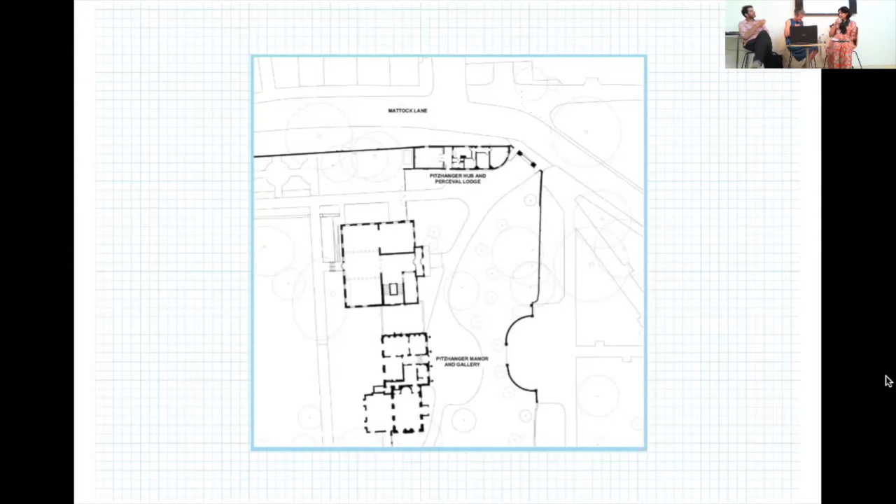One of the first decisions we started to make was the idea of a transition space, how to deal with the facade of the existing lodge, and how we could create a space and how that space would link. Initially, programmatically, it was preferred to link the buildings physically, which presented a series of very problematic architectural decisions about how we would actually deal with a listed facade delicately and sensitively. We did look at several ideas. We had ideas of having a glass roof there.

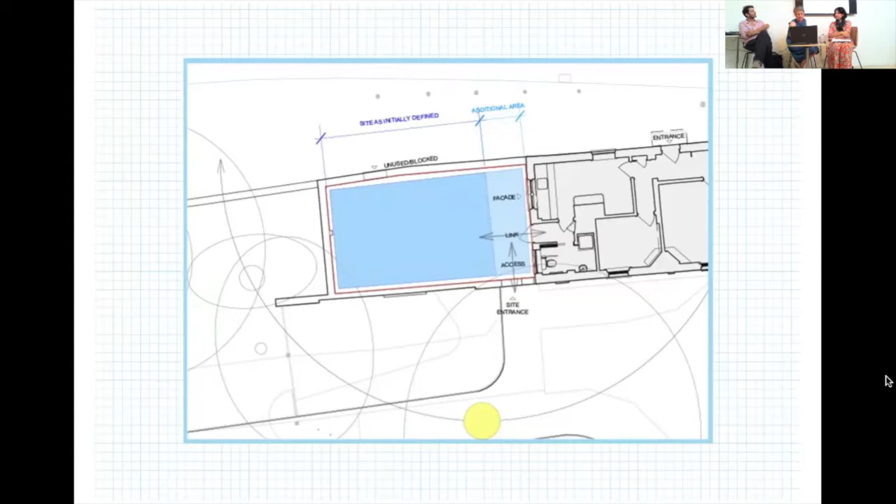Obviously, programmatically, it was a transition space because of the doorway and the circulation routes between the lodge, the manor, and this space. And we also wanted to see it as a transition space architecturally. So it was always the idea that it would be a different type of space there to here. Eventually, through many different options, it was decided that the best thing was to leave it as a courtyard, a completely open space. And there you see the courtyard, which has become a lovely place for us to have our lunch and have meetings when it's sunny.

So the decision to use the existing courtyard walls threw up a set of interesting challenges for us. Building within the courtyard, we found that we were working in a kind of hybrid type of building, because it wasn't an extension, nor was it a standalone building because of its relationship with the lodge. It wasn't a new build, nor was it refurbishment. So we found that we always kept slipping between two stools in how you might justify or consider the building.

Well, Steve might talk later about the problems with justifying the walls structurally, because they were built as garden walls, and yet we wanted to use them as a wall to hold a building up. And that's quite an interesting issue, I think, with reuse of spaces in brownfield sites. And also how to make these garden walls become firmly dry and thermally efficient to create a warm space.

Another technical challenge was that, as you mentioned earlier, the walls were not orthogonal. They were not orthogonal in plan, and they weren't orthogonal in section. So they sort of wobble all over the place. But there's a very strong kink there, and I don't know if you can see what we've actually built. The roof is orthogonal. We made a decision to build the new roof orthogonally and have it sitting on top of these sort of wobbly walls.

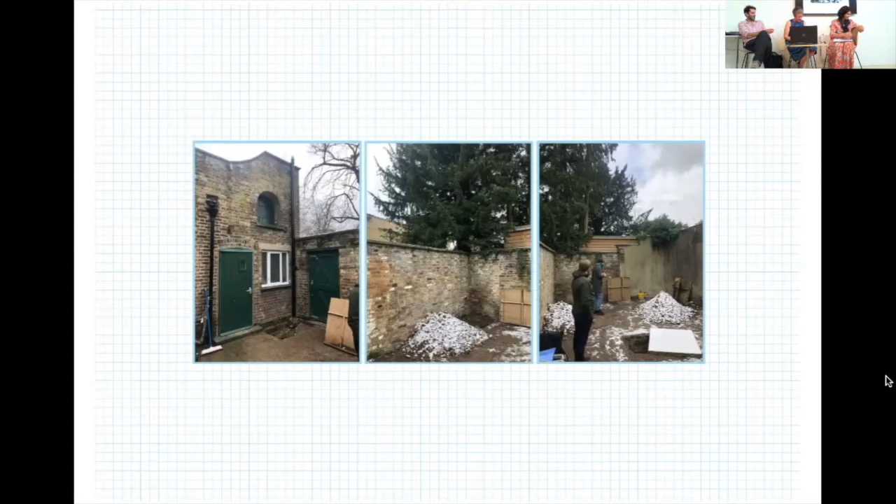So obviously, what would John Soane do now? We had to develop a response to that question. His work is famously rich and multi-layered, and we could have taken it in so many different directions. The areas that we explored were notions of buildings within buildings, glazed lantern structures, ceiling architecture, internal lightweight tensile forms, geometric artifice, ambivalence to resolution, the use of innovative technologies, and crucially the play of light.

So using the external walls, we made a decision quite early on that we needed to take the higgledy-piggledy and calm all of that down a bit and try to respond to the rigor of Pitzhanger Manor, and to create a sort of visual order and clarity to our intervention. So we very quickly decided to form a datum, and the datum that we chose was the height of the lower wall on Mattock Lane.

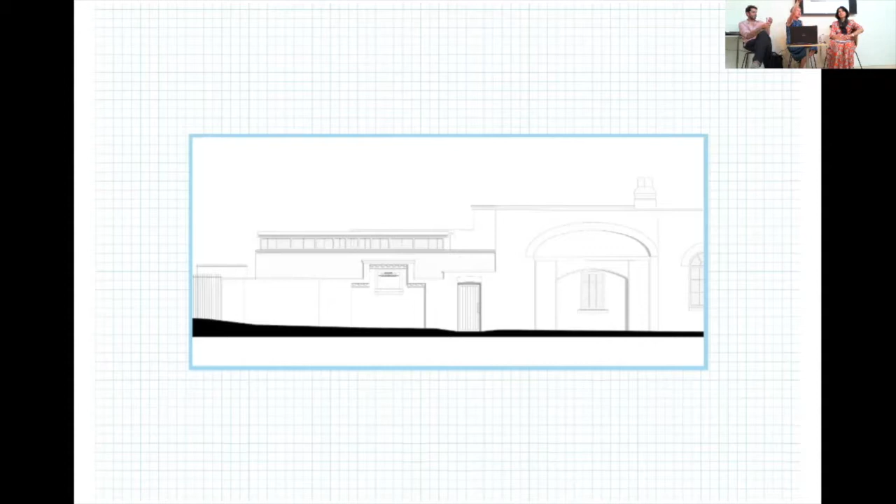And here's an early drawing that we did that was exploring how we would work with all the different varying heights. So we have a wall that's higher, we have a wall that's exactly the right height, we have a wall where our roof just tucks under the wall here, and then we had walls that were much lower. And so we built the walls up to the datum, and the datum became a strong visual reference point all the way through.

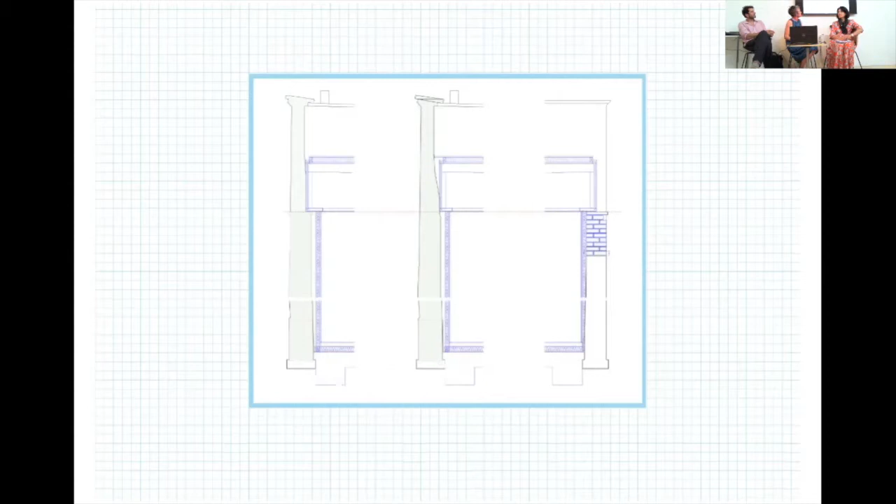So aesthetically, we wanted the wall, especially the wall here facing Pitzhanger, to be read as a single wall. But we wanted the history and the contours of the wall to be legible when looked at closely. So there was this sort of double reading of the wall, really, but it wasn't something that shouted at you, but it was there.

So I'm just going to go back to this approach, though. Building the walls up and retaining the masonry walls meant that we didn't have any opportunities to get natural light or ventilation into the space at lower level below this datum. And so at that point, in response to the Soanian lantern, which you can see just popping up behind there, we decided to use the idea of a glazed lantern to create the roof that sat on top of the walls. Here you can just see it popping out behind the taller bit of wall. There.

And there you can see the idea of the roof just sitting on top of the walls, coming down as a lantern. So from the outside, it's a very modest building, sitting quietly against its neighbour.

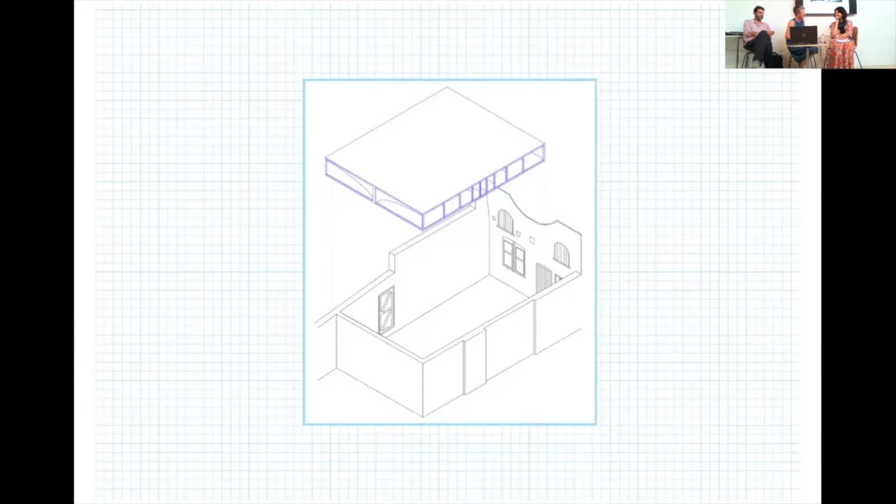So Steve will talk about the joys of making that work structurally, that decision. Soane was called a ceiling architect by the 20th century architect Philip Johnson. And there are so many beautiful examples of his ceilings, even here at Pitzhanger, but elsewhere. His work is described as playful. He was not rigid in his use of geometric form, nor is he concerned with resolving or explaining the structural resolution of his work.

This playfulness allowed us to feel that we could take a form and play with it. So what we did is we took an idea of his handkerchief ceilings, where you have the dome that comes down in the four corners. It's described as a handkerchief ceiling because it's the idea of a handkerchief being blown up in the air and the four corners tethered. And we decided to dissect and mirror that ceiling through the two axes in order to respond to the lantern and to allow light in.

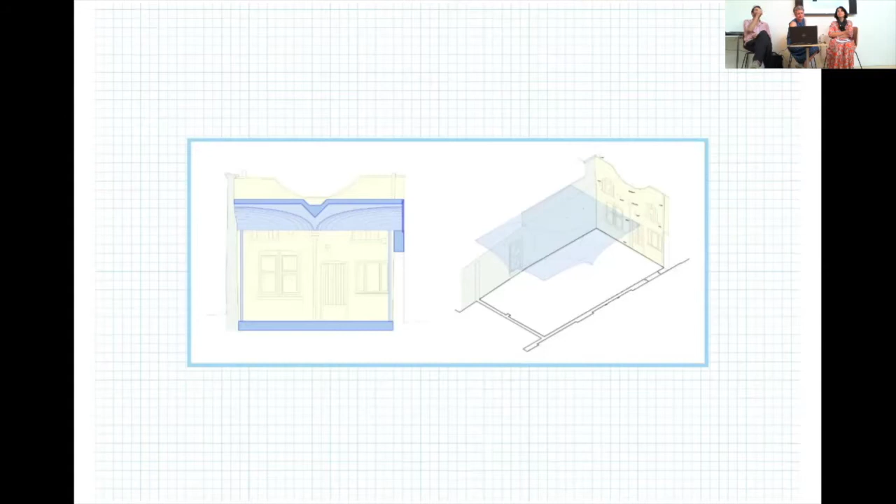So you can sort of begin to see the shape that's formed by doing that. So that was the very early drawing exploring that idea. And this is what's led to this undulating form, if you like. It's the generation of this shape.

Another of the qualities of Soane's work is the play of light, and so we've particularly enjoyed the play of light that falls on the fins and how that changes through the day. And also he liked to use mirrors, and where the Mattock Lane wall is higher and where we couldn't get glazing, we've put mirrors in to bounce some light around and be playful.

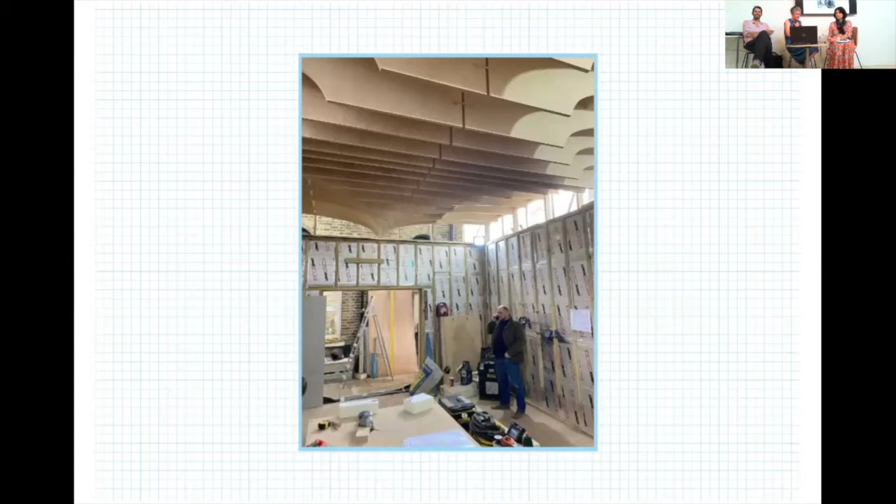So he was known as well for his innovative approach to building, and actually his use of very simple building materials. He was actually criticised at the time for his use of simple brickwork. So we very much enjoyed the idea of using simple materials, and I think Steve will talk more about that, but this is made with just standard sheets of ply.

The original ceiling that we were talking about was formed by a tensile structure, which is like a stretched shape. We decided to do a modern interpretation of its visual appearance by creating fins, like contours cut out of vertical fins, rather than actually trying to replicate a tensile structure.

Each fin was designed and drawn in CAD, computer-aided design, and then sent off to a fabricator who cut them out. Each fin was then delivered. If you look very closely, you can see that there's a number on each fin, so that they could be assembled on site by the very clever, very impressive contractor.

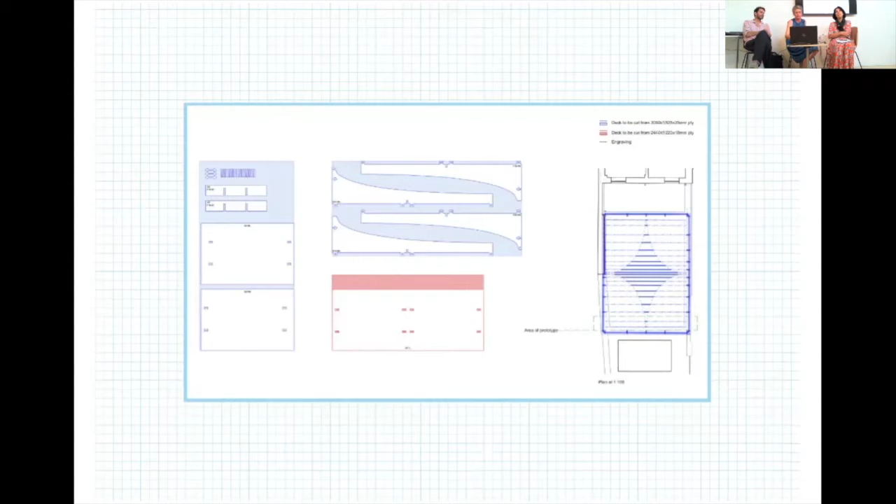And structurally, Steve will talk about the structure and how it appears to sort of float. Again, there's not a strong visual structural resolution of the ceiling and the roof. And this is how the roof is put together without any screws. That's right, isn't it? It's called a tab and wedge, and I think Steve will go on from there.

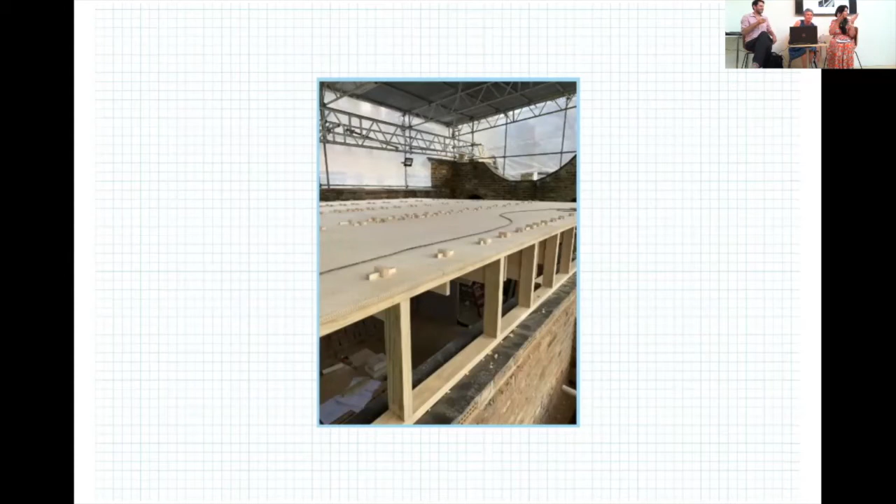Yeah, okay, sure. I'm going to just very quickly interrupt because I should have said this at the beginning, and forgive me for not saying it before. Please, I know one of you already has, just put up your hands if you want to ask a question at any stage if anything's not clear. We'll obviously have questions at the end, but I'm happy to have any questions. So has anybody got any question before we move on to Steve?

Could I just say, if you turn the lights off, we wouldn't have the glare. Very good. Yeah. We'll do that. Thank you. In the daylight.

You have the three walls on this side, plus the roof, isn't it? I'm so sorry, I didn't hear that. Can you say it again? So the walls plus the roof on this side, isn't it? Yes. How did you deal with water? Or is that purposely the wall? Yeah, it just meets the wall, that's right, yeah.

Let's hear a bit more about walls, or do you want to ask bigger questions? What do you think? Walls now? Or were you going to explain walls more? I was going to talk about walls. Why don't you let Steve talk about walls and keep that going? What was it about walls? Give me a hint. Ridiculously, I didn't realise walls could be listed, of course it's obvious, isn't it? Does the same sort of tiered system apply to walls, like grade 1, 2, don't touch it, too expensive, that kind of criteria?

I think it would be difficult for a wall to have a very high grading because that's often about interiors. And often walls are usually listed because they're in what's called the curtilage of a listed building. So they're listed because they form part of something else. So a wall is very rarely listed on its own merits. It's usually because it's part of a bigger context. And I wondered what work you've done to the original walls, but maybe that will emerge.

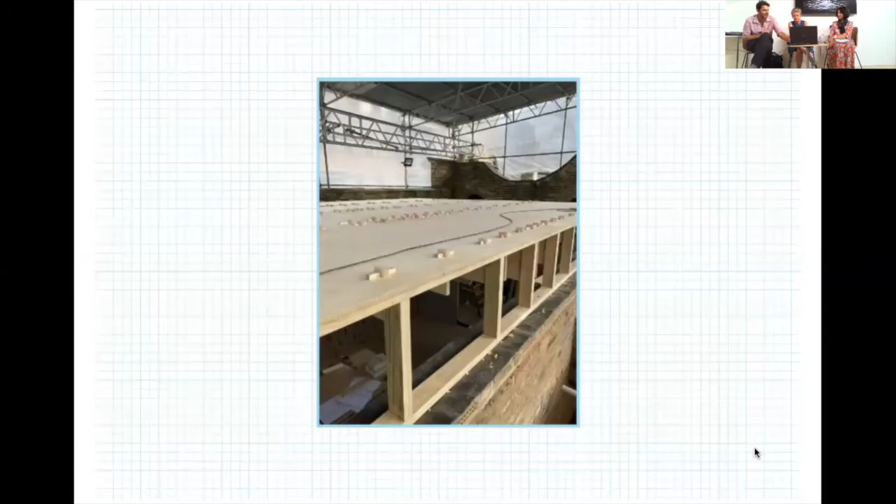You anticipated something there. So our company is Webb Yates, and I'm Steve Webb, and we are the structural engineers working with Joe to develop the design. We're 60 people, and we do some small projects, but we generally work on bigger projects than this, and we work from very small scales up to big things at the airport.

But we're really concerned in general, and this is not very Soanian actually, with making structure really interesting so that you don't want to cover it in plasterboard, and making the structure part of the architecture, which I think is something that Soane really didn't give anything about. And secondly, also trying to be very frugal with the materials that we use, and trying to use materials that have low energy, low embodied carbon, and do as little as possible. And particularly when you're refurbishing old buildings, it's very tempting to stick in steels and pour in loads of concrete, but actually what we try and do is to do the minimum amount possible and make everything work.

Well, I would just say, Soane was very innovative. So I would like to think that he would be worrying about that today. The other thing Soane was brilliant at was recycling. So he would have things left over from other projects and he would reuse them, as you see a lot in Pitzhanger, from the caryatids and the staircase and lots of other things, the arches and so on. So I hope he might have picked up the baton. Not so great on the first point, but on the recycling point.

It's interesting, building is a massive part of the carbon climate change problem. Concrete and steel particularly are things that have come about as a result of the coal and the fossil fuel era; for thousands of years that we've been building, there's 150 years of fossil fuels, and we build with huge amounts of energy. And Soane was at the beginning of that, and we're, I guess, coming down the other side. So he was entering an environment where they were industrializing coal production, mass construction in bricks, but they didn't really have steel and stuff yet.

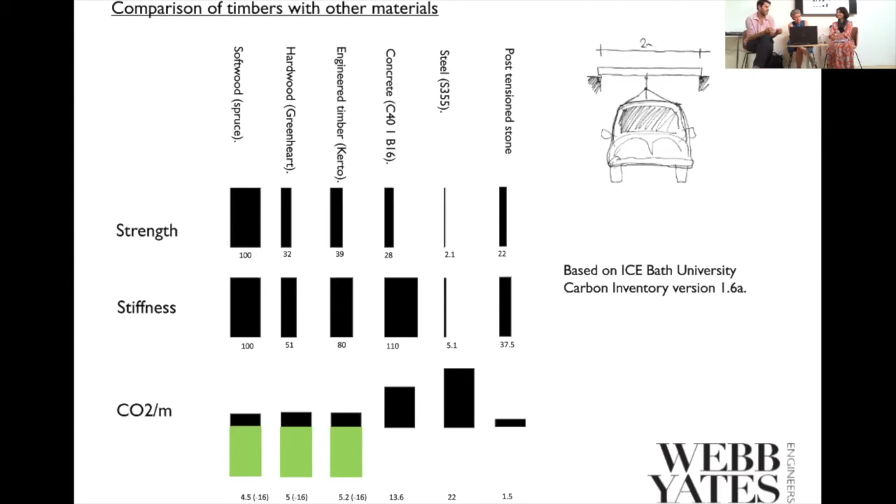And that's the same for house extensions and little projects like this as it is with big ones. So our approach with this has really been to try and A, do as little as possible, B, use natural materials, use timber, not use concrete, steel, and to do as little as we possibly could with the existing courtyard.

So when we came to this, there's 4 walls, and most engineers will come and go, oh, that looks a bit dodgy, what are we going to do with this wall? But actually, there's a great big sign on the wall saying 1832. And you think if something stood since 1832, I can't remember, 170 years, 190 years, the wall has been here, and I'm going to come along and go, oh, I don't really trust this based on my limited experience. So my attitude is, the wall's been here forever. What's the problem? And particularly with reference to the wall, we didn't want to do anything to it.

So what we've done is to this floor, rather than putting a concrete floor on the ground, we've spanned a wooden floor between the existing brickwork walls. So there's a gap of about this much underneath here. It's the ground underneath, which you can feel.

Have a priest hole or something down there. Yeah. Those are going to come into use again.

Possibly. And it's quite a long span, so it's about 5 meters. And in order to do that, you need quite a big timber. So what we've done is what we call a stressed skin. So we have a series of joists, and we glue a plywood layer on the top of those joists, so that when the joists deflect, the plywood is compressed. And so what's under your feet is not a decorative floor finish, it's the structural top of the floor structure. So actually what's here inside that timber is the compression of the span of the floor, and there's underfloor heating.

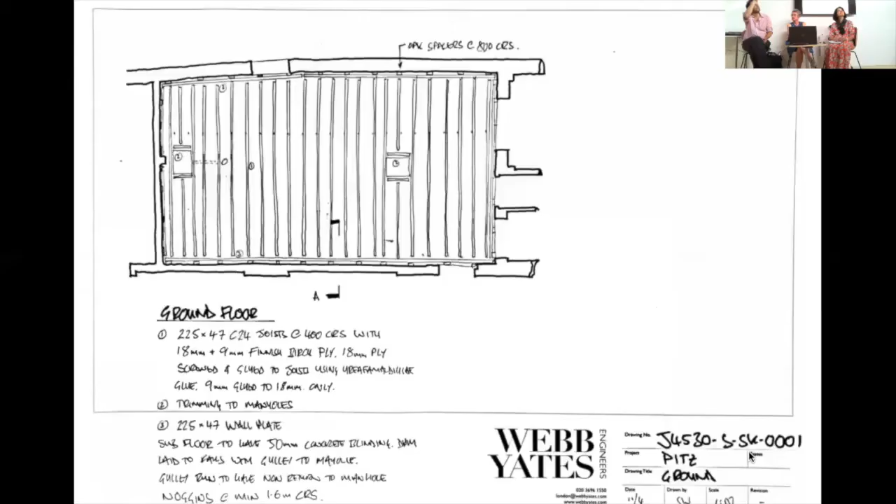so you have to transfer the compression, and the plywood on the top surface has a, actually I should be, sorry, sorry, I did it for you. Sorry, I thought it might be useful.

So the little tabs and wedges connect the plywood on the top to the beams underneath, and the plywood in the middle carries the compression. So it's pushing on the plywood and it's pulling on the little toggles underneath, and it spans from one side to the other. So a sheet of plywood costs £100. It costs £50 to CNC it.

CNC means computer numerical control, and you put a piece of plywood on a router, so it's like a spinning drill blade controlled by a computer, and the machine cuts all of these shapes automatically, very, very quickly, and very precisely. And so you can see the precision of the cut is such that you can cut that arrow out and just slide it tightly into the hole.

I love the fact that the drawings to illustrate that are sort of hand drawn and that kind of translates into computer generated. It's kind of a wonderful contrast with the intent and the reality. Well, we want engineers to think and be active and design, and not just kind of numerical statics consultants.

So everyone in our office, and Rosie and Sarah here will testify to this, they get sent on drawing boot camp. And we have no tolerance of shit sketches. So if anyone's doing bad sketches, they get whipped. The thing is that people think it must be pristine and it's right, and it can't be challenged. Whereas in reality, it's just drawing whatever you decide.

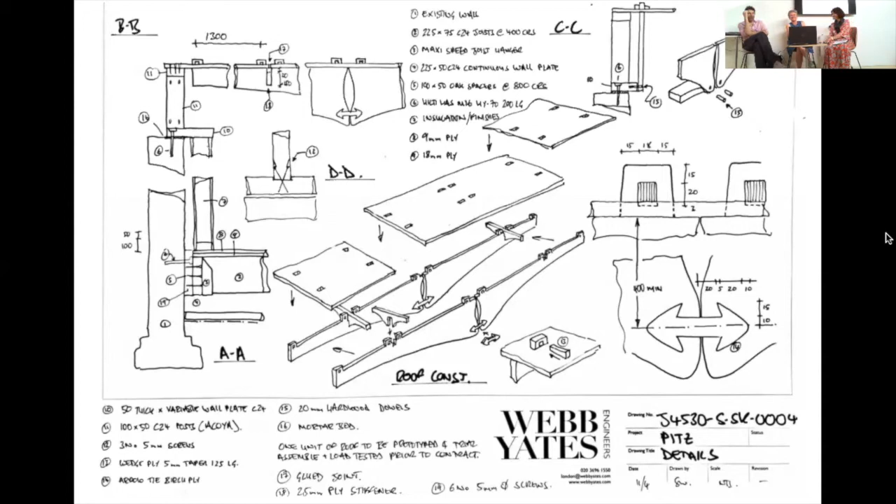Money came from, I'll tell you exactly where, you can see their names on the outside, trusts and foundations who were excited about what we were trying to do, excited about the way in which Joe and Steve were developing it, but also excited about supporting the volunteers who wanted to work here, and also creating a community hub that we can use for the community. So it was all grant money. All grant money, yeah, and one individual finished it off.

So it's named after the most major donor, who named it after his wife, Rachel Darroch. So it's the Rachel Darroch room, because he filled up the gap at the end. So I just asked, you said there was just one trust or foundation? No, there are about five. You'll see their names listed outside. Was there one that came along and said that we want match funding? Yeah, actually that's what we started off with.

So somebody called the Architectural Heritage Fund. They were absolutely brilliant, because when you first start having these ideas, you can't go and get funding from a trust fund until you've got a design. You can't afford to employ Joe and do the work that works it out when you've got no money. So we went to the Architectural Heritage Fund, who said they would give us a certain amount of match funding to work up the plans, to employ the architect, do some initial plans, get planning permission sorted. Nothing done at this. Yeah.

So we just couldn't afford to do that, because we were just finishing off this capital building, and we were trying to do this semi in parallel with that, and we just couldn't afford to do anything else without it being funded. So that was brilliant, because that gave us the seed capital we needed to recruit Joe, get planning permission. I think the test pits were done with that money and so on, and then we came up with the final design. Went to the other trusts and foundations and said, now this is what we're going to do. Take it forward. It is a journey.

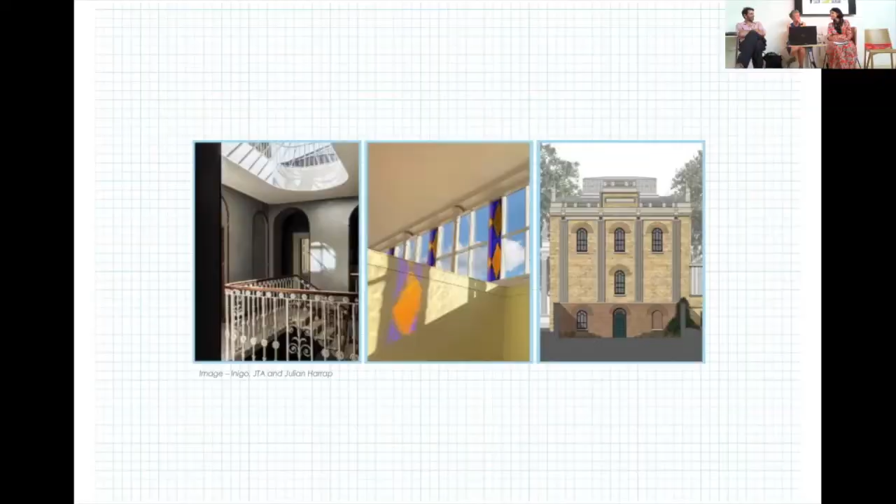We did actually get consent to put the glass roof in, didn't we? So we did manage to get something approved. We just ultimately chose for various reasons not to go ahead with it. And have you submitted it for an RIBA award or other? Not yet, it's in the process, but I really hope it does, because I really want it to be a sort of beacon that you can do fantastic design with a low carbon footprint at low cost. I do see this as a village hall example of something super that can be done creatively. So I really hope it wins some.

Can I ask, do you try to earn income from this? Yes, we're really struggling with that. We didn't design it to be income generating. We designed it as a community feature. We found out very early on that there is a need in Ealing for a communal space because there isn't room in the town hall anymore. And so we wanted to have a space where, you know, the Alzheimer's Society or whatever can meet in the evenings. Obviously, we need it for our volunteers during the day.

So we didn't design it as a commercial space. Interestingly, since our plans, COVID has struck and every organisation has been challenged financially to the limit. So one of the things our trustees have asked is: absolutely make it available for community usage, but if there's also commercial usage, we must do that too.